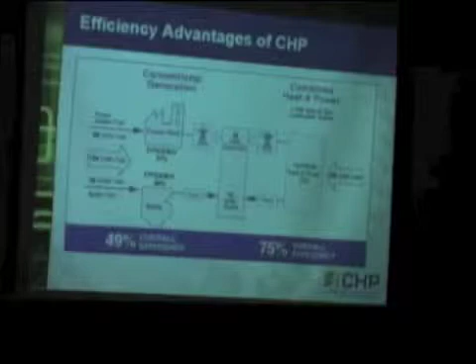Because when you first look at it, the idea that you would put in a heat-producing device that costs $200,000 when you can go buy the same amount of heat out of a $50,000 or $40,000 device, it confuses people sometimes. So over here, we have how your building is getting power or energy today, electricity and heat.

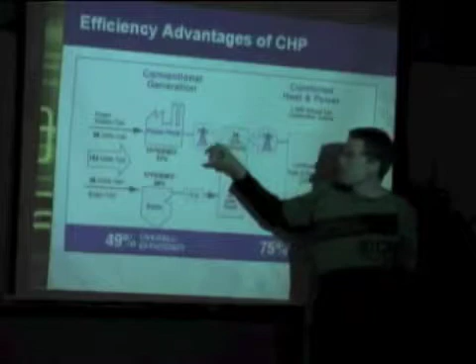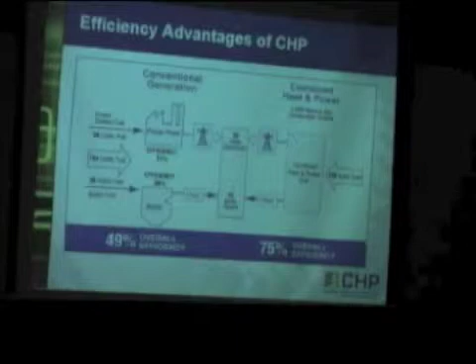Right now you're pulling electricity from a central power plant, Bow, Seabrook, those plants over in Newington. Have you seen the power plants over in Newington? There's a power station in Newington called Schiller. It has 4 chimneys sticking out of it.

And what's really interesting, the chimney on the far right is a wood-fired boiler. So what you'll see over there is mostly the steam coming out of that 4th chimney because they want to burn as much wood to generate power, because the other 3 burn coal. So you will always see the wood one running, and when there's peaks, the other 3 will start kicking on to meet the demands.

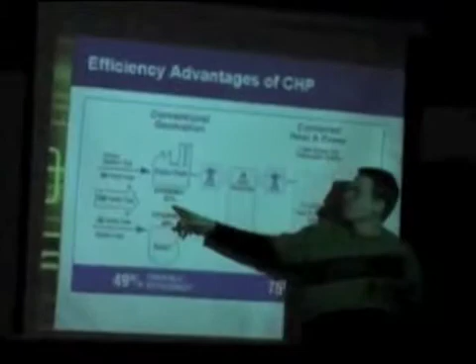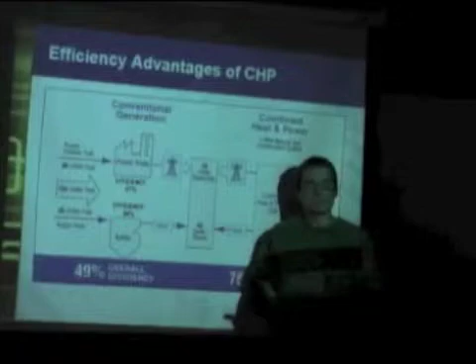But that's a very inefficient way to produce power. Whenever you're burning wood, coal, or anything, only 31% of the energy in that wood or coal is becoming electricity, because the rest of it is just heat, and it's getting burned and going up the chimney. What you see coming out of the chimney is steam or heat mixed in with pollution.

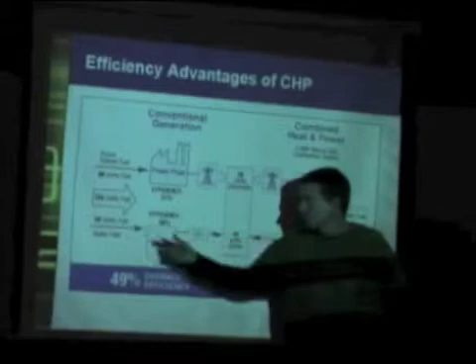On your heating side, you have a boiler that's taking fuel to produce heat, and even the boilers are only 80% efficient. So in order to get what you need in your building, let's just say it's 30 units and 45 units, you need to put this much fuel into these 2 systems.

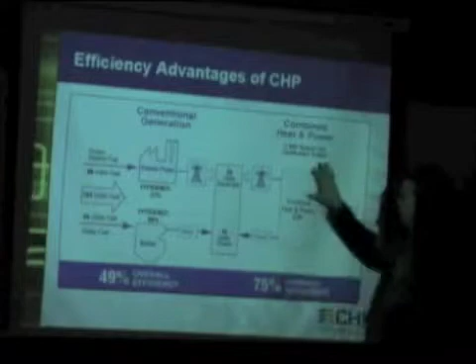Now, a combined heat and power plant, which is what we're proposing, to produce the same amount of heat and electricity, you only have to put 100 units in. And the reason is because the cycle that's generating the electricity is also producing the heat. That's where you get the name, combined heat and power.

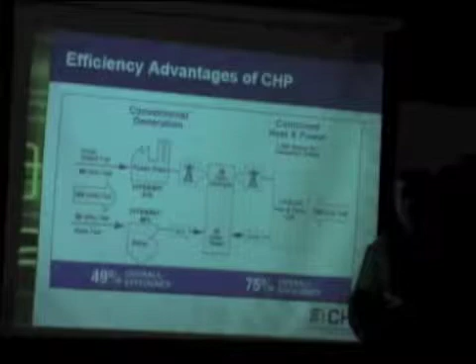So the way these systems work, as long as you have a heat need, meaning to keep the building warm, it's a great way to produce your heat because you get all this free electricity on the side. So that's how these systems work.

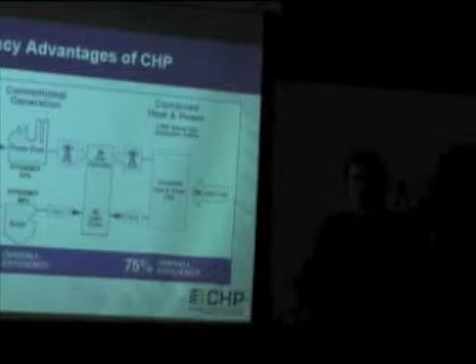And here's where the other kicker comes in with combined heat and power, or CHP. They save you money the more they run. So think about that compared to a regular heating system. Normally you want a heating system to shut off because whenever it's burning fuel, it's costing you money.

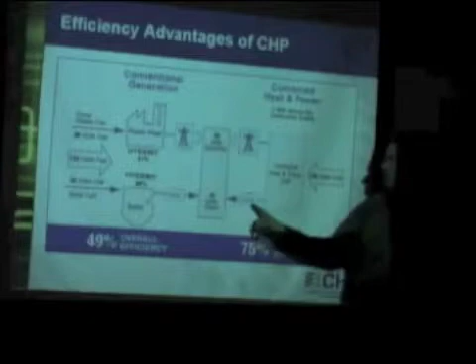In a CHP plant, yes, it's burning fuel, but every time it's burning fuel, it's producing free electricity. It actually is saving you money because you're making the electricity cheaper than the grid can make it. And so as long as you can use both the heat and the electricity, you will always save money using a good CHP unit.

If you have to dump heat, if you're trying to just generate electricity, then you lose that benefit of all this extra heat. So it's always got to be a system that's designed to use both sides of the energy coin. Does that make sense?

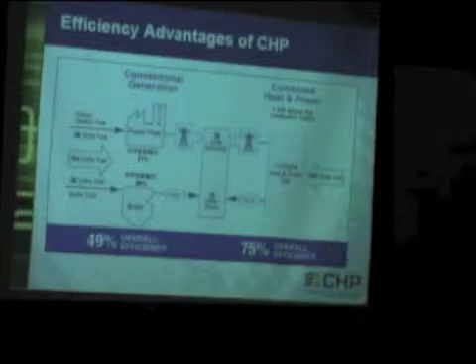So that right there is really the trick to CHP. Most people don't get it - it's hard to grasp the idea that you want to build something that burns more fuel. But you have to understand that when it's burning that fuel, it's doing it better than the power plant.

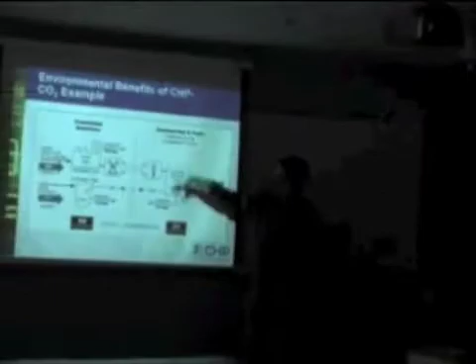Same concept works on the pollution side or the CO2 side. You have a boiler that releases a lot of CO2. You have a power plant that releases a lot of CO2. On the CHP side, you're using natural gas.

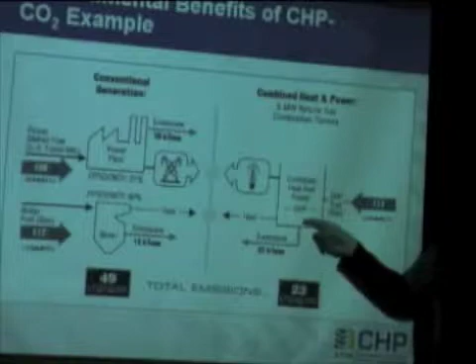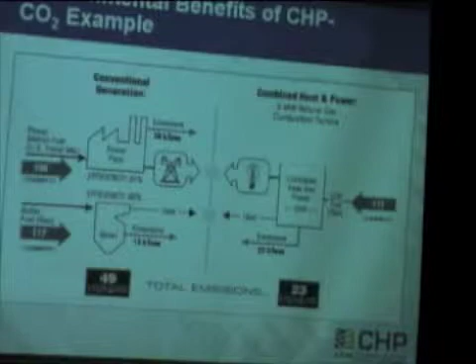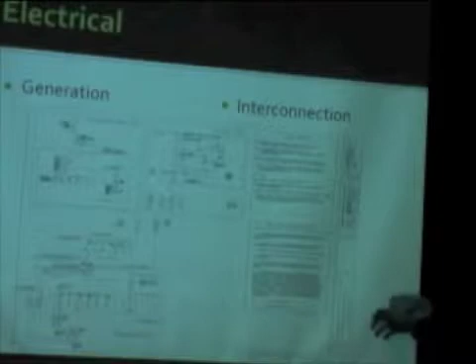So the various engineering trades - we'll share these plans with you at some point here over the next few weeks, particularly before you go look at an installation that we're doing, so you can see the plan and then see the installation. But on the electrical side, we have 2 major issues.

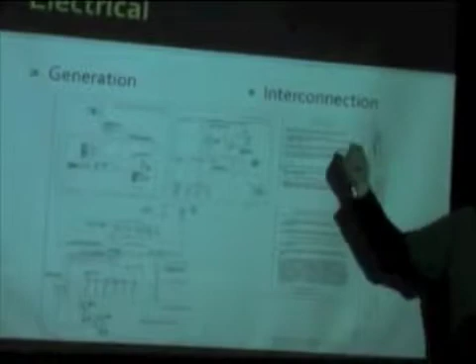One is how much and how are we generating power, and 2, how do you connect that power to the building as well as to the grid. The building people obviously don't want problems. The grid, meaning Unitil or PSNH, they get very upset when people connect to the grid if they don't do it right.

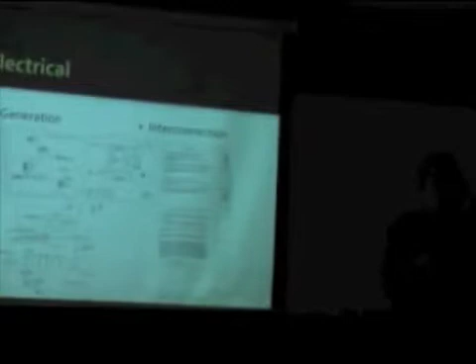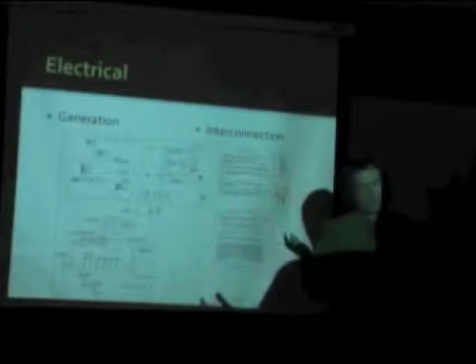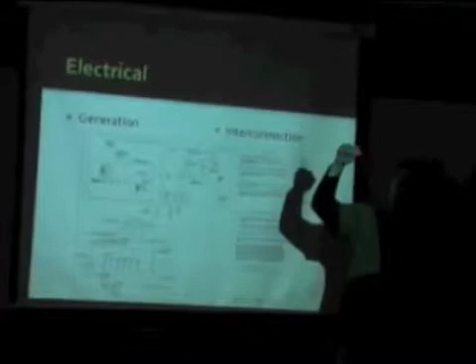So we have to have all kinds of safety equipment between the power generating device and the connection to the grid. Because if at some point this building's load dropped and our unit was running, we would put power back into the grid, which is okay as long as all those safety devices are in place. So if the grid goes down, our unit comes off. It shuts off because you don't want to feed power to the grid when people will be working on the lines. That's how this system is designed, and that's the role of the electrical engineer.

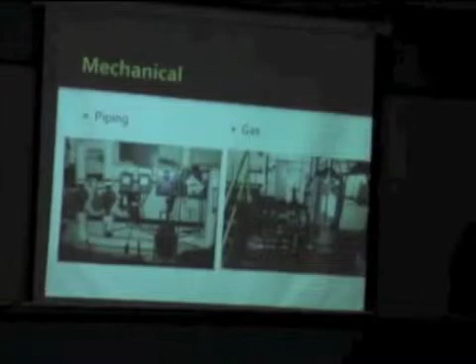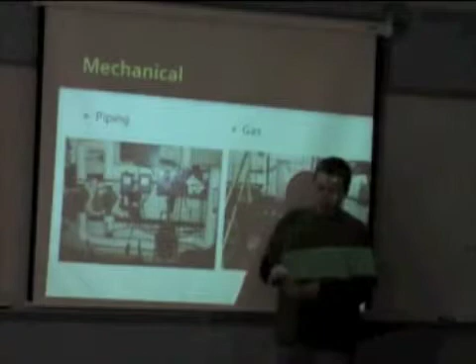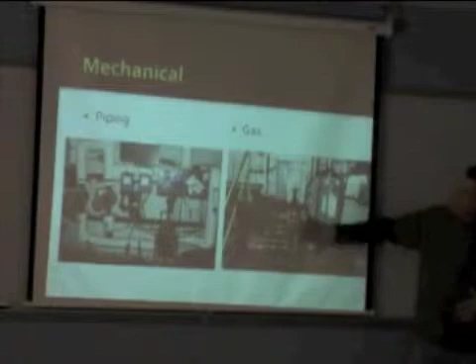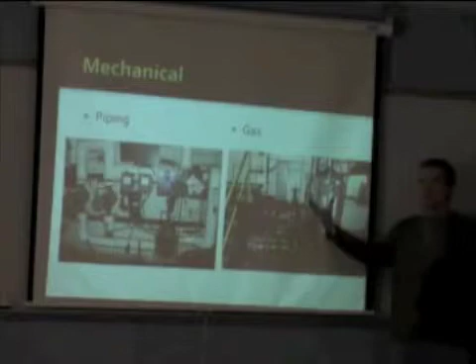On the mechanical side, the engineers had to design the size of the piping, the pumps, more than one pump. This is the old system, we're going to replace this. But all of this has to be engineered perfectly so that we have a well-balanced system. How much heat is going to be traveling down this pipe at how many gallons per minute? How many pumps do we need, et cetera. In the same engineering group, they also had to look at how much gas this building uses and how those pipes have to be designed. If you have a pipe at a certain size and pressure, one has to be welded, the other can be threaded. You go through all these exercises. These are not something someone like me can do. We have to have engineers do all that stuff to make sure it's all safe.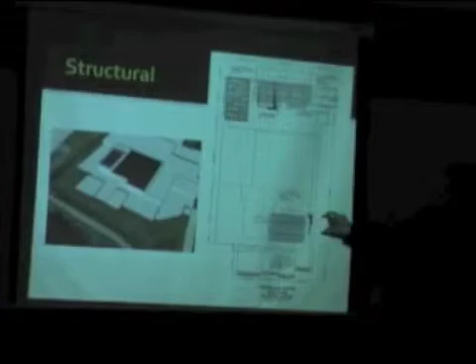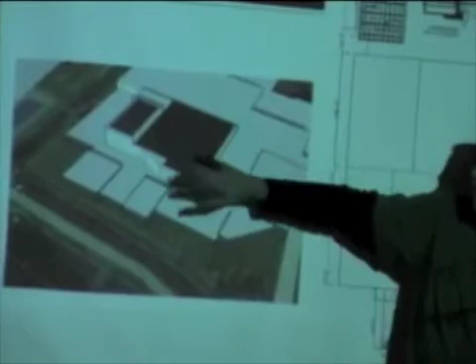The structural engineer - I showed you this picture, it shows all the array here. When we got into the structural analysis of the roof, we could only use a portion of that roof, so we had to split the array into 3 sectors. There will be a portion of the array on the auditorium, a portion on top of the weight room, and a portion over here on the locker room. In order to come up with this solution, the structural engineer had to look at the plans and understand how much these panels were going to weigh.

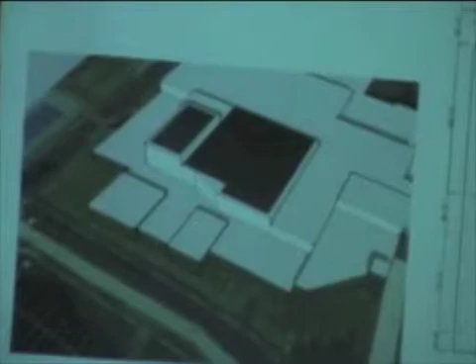The last thing I'm going to talk about, I'll show you how we had to go through this exercise so you understand this would have never been figured out without a whole bunch of engineers working together. The electrical engineer and the structural engineer had to work together to come up with this solution. And I'll tell you what - that's the end of the presentation part.

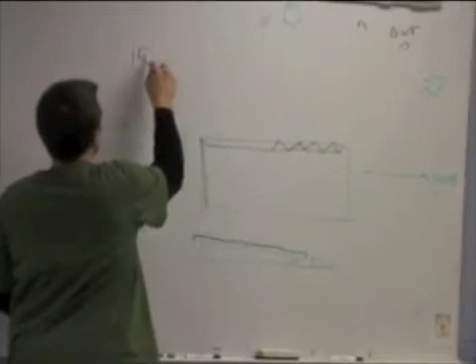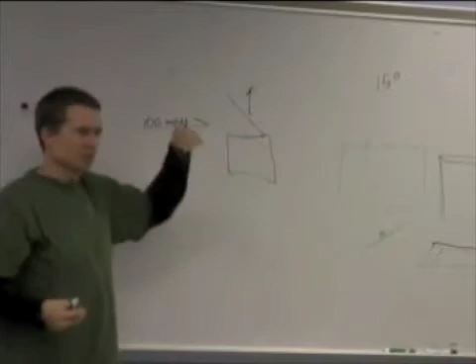Interestingly enough, the weight of the panels is not necessarily a concern. What happened was the panels, because they're going to be angled at 15 degrees, they're going to lift off a little bit. And when you have a building that's lifting something like that, and the wind is blowing at 100 miles per hour, which is the code we have to reach, you get not weight, but lift. So we have to make sure these panels will stay on the roof at a wind of 100 miles an hour. That gives us 2 choices: bolt it down or weigh it down.

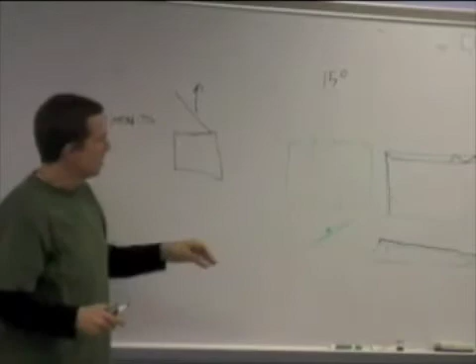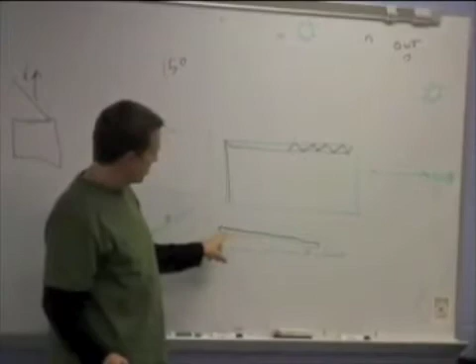Nobody likes bolting things on a roof because you have to cut open the roof and put holes in it, and even if you seal it up, there's always leaks. So we had to go with the weigh-it-down approach. We're actually putting panels up - this is kind of a side view of a panel, here's the 15-degree slope, it's actually going to be a little steeper. We found a company that's come up with a design that has a little piece of metal on the back so it kind of deflects the wind. Then on the front is a tray, and we had to put bricks in it.

So the weight didn't become an issue until we had a wind issue. Now our panels are going to be sitting on the roof without any kind of bolts, with a whole bunch of bricks holding them down so they don't blow away. So now we have a weight issue, and that's what pushed the array into all those different locations.

That's where we got a little tripped up during the installation process. It's a brand new roof, and the school board, rightfully so, was hesitant to have any kind of cuts in the roof, and so were we, frankly. We don't want to run the risk of creating a situation where we have to replace a roof - that's a very expensive thing. Instead, we're just going to lay down another piece of roofing material, put the panels on top, and then put bricks in them. So that's where we ended up with this whole other multi-location installation process.